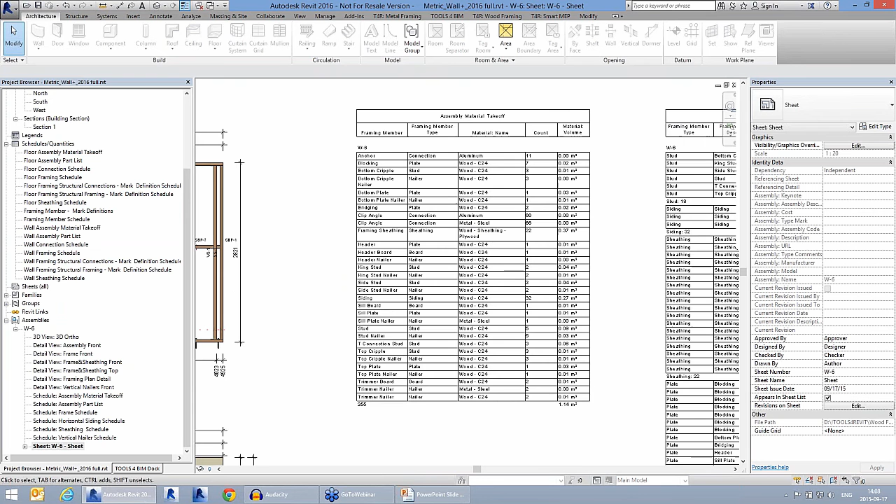Now I would like just to show how it's done from the beginning, but in general this is our target, what we should get. And today I will try to explain how to frame such a house. At the same time, if we talk about Wall Plus, here we will be able to create automatically shop drawings for every individual wall panel. So we will make shop drawings automatically, the tool will add dimensions, the tool will make schedules automatically of material takeoff and the part list, and we will put all those views into the sheet.

So now I would like to start with an empty project. First I would like to say that Wall Plus you can find in the separate tools for Revit with the framing tab. In the beginning I would like to show that this is a regular wall that comes from architects. It has the layers with the thicknesses and with materials, and we're saying that here we are going to put the main frame, then sheetings from both sides, then the layer for the nailers, and then the siding. So this layer we are going to use for making sidings.

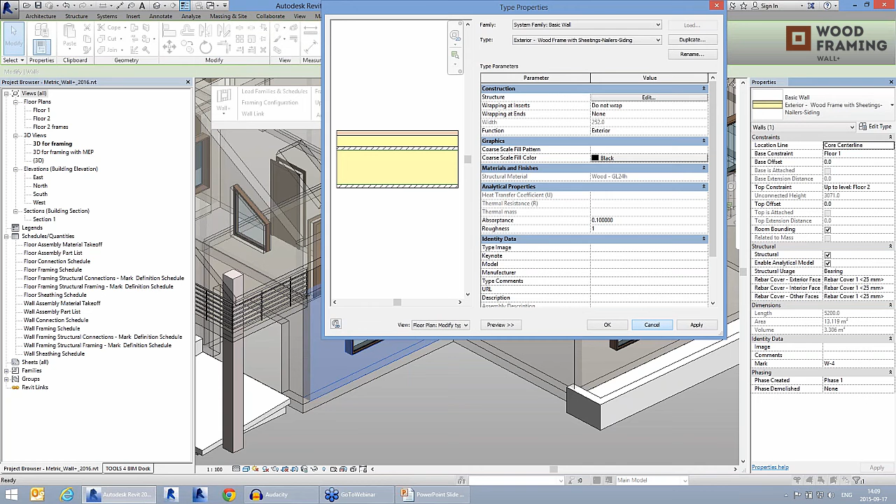So if you would like to frame the walls, you have to make a link between the wall type and the framing, and as you can see here we can predefine and set each individual framing layer for every wall layer, and at the same time we can predefine the configuration, what kind of settings we would like to apply. In our case, let's frame the wall, so let's add main frames into those three selected walls. So in general, you just need to select walls from the project, press on Frame Wall, and the tool will frame those walls according to the predefined configuration.

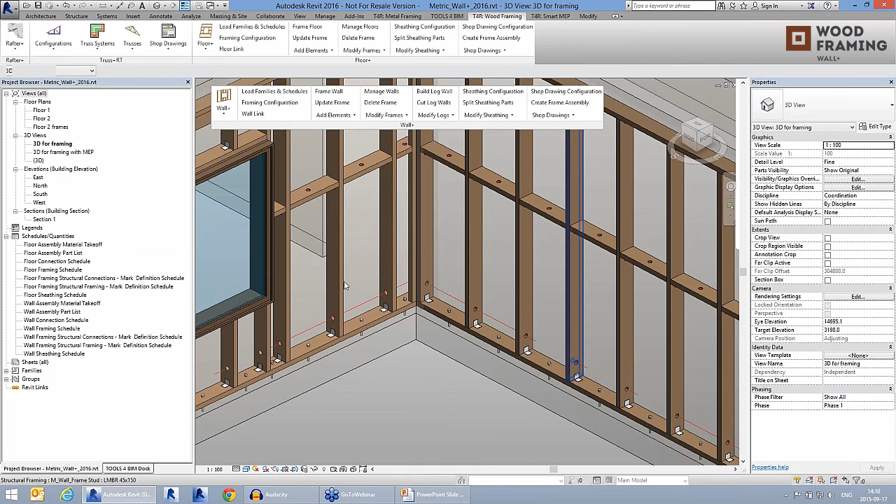Okay, so we're finishing with framing those wall panels. And now the tool has created the frames automatically with predefined distance, with connections, with some headers, with some top supports. And let's take a look where it comes from, where we can predefine such settings.

So in the Wall Plus we have framing configuration, where you can predefine settings for all the frames. Actually all the settings are grouped together according to configuration type. You can predefine your own configuration separately for the battens. It means horizontal nailers, then for the main frames, then for the horizontal sidings. If it's necessary, you can predefine settings for the secondary frame or for the vertical nailers or for the vertical sidings, and even you can predefine settings for the log houses.

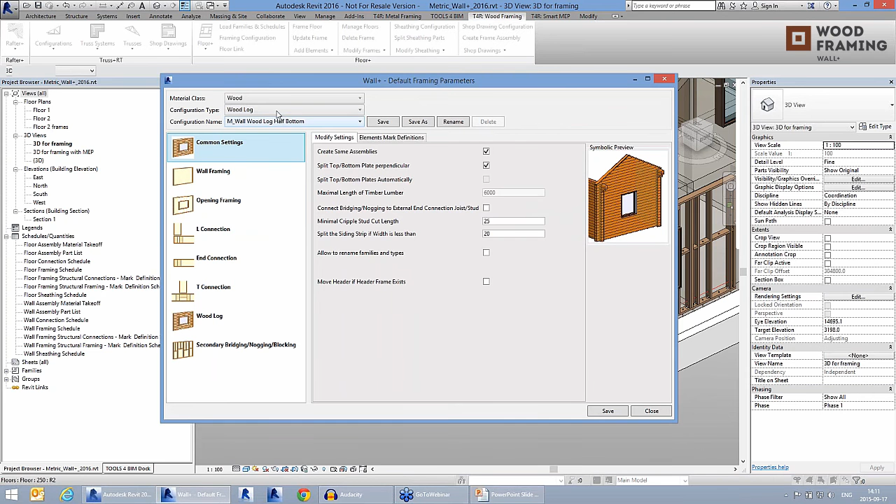Okay, so let's take a look into the main frame, because here we have the biggest amount of different settings, and you can save your configuration under your own name. Actually, some default configurations will be automatically loaded into your project. And here you just need to predefine what families you're going to use for the main studs and for the plates. Then what will be the mark definitions. That's very important, because those descriptions and framing member values will be added later into your schedules and could be used in your tags.

Then with the wall framing, you have to predefine the distances between the frames, what will be the top plate, what will be the bottom plate. Maybe we're going to have the cut, for example, or if it's necessary, we can have some additional offset from the base or from the bottom of the wall.

Then we have options to predefine openings, opening framings. We can predefine different opening headers for different window sizes, for example, because here we have configurations separately for windows, doors, and for other openings. And you can choose that if your window, let's say, is from 1 meter to 1.5 meters, you can predefine configuration with such a header or with any other header from the list.

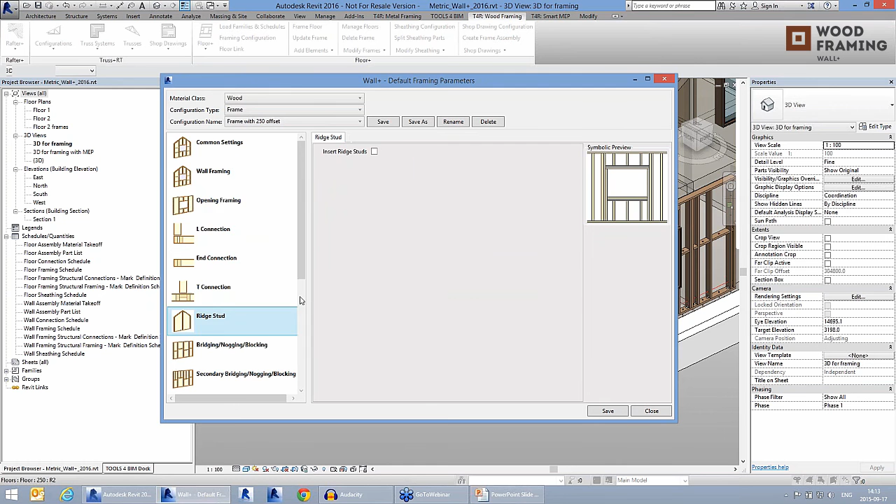Then we have settings for predefining different bridgings, blockings, and noggings. Again, here we have really flexible rules for predefining additional bridgings and blockings. Then we can predefine a secondary bridging, blocking, and nogging. Then the bracings. Then we can additionally add studs and additional bridgings and blockings to our specific place if it's necessary.

Then we can predefine details automatically, like we saw in the frame in the beginning. There could be different angles added between the plates. Then we can automatically add the service holes between the families. And we can put details and service holes only on the studs separately. So all those settings you can predefine and save under your own name, and actually those settings could be shared with other users. And it's very similar to any other configuration.

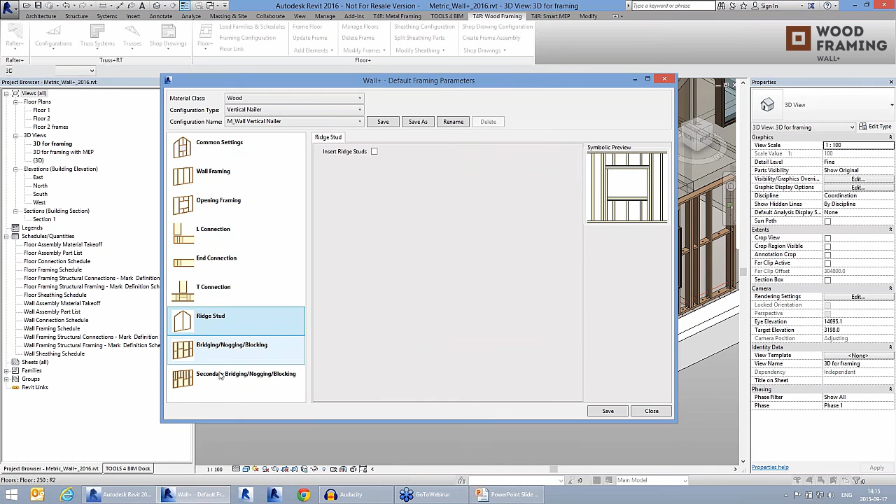So if we talk about the vertical nailers, again we have settings, but they're very common and very similar to the main frame. Just here we have settings only for the vertical nailers. And if we have such name, then we can make a link like we did before. We have the possibility to make a link between the wall type, which comes from the project, and the configuration from the framing configuration tab.

Okay, so let's frame more walls. I'm going to select more walls with more complex shapes. So there will be 3 more walls framed, and here I just want to show one example with a triangle window. If we have such scenario and such window in the project, we can frame it very easily.

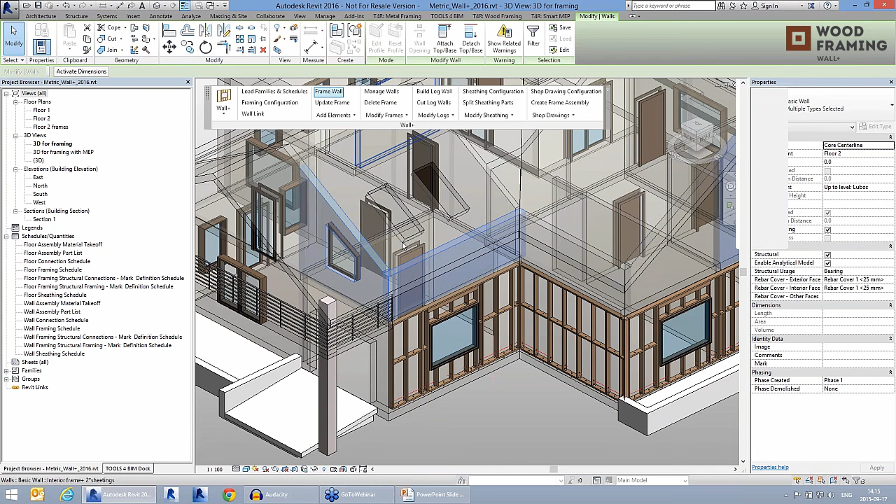And if our wall shape is complicated, and actually if we have a cut according to the roof, again we can very easily frame it, and the frames will be automatically adjusted according to the wall shape.

Now, if we would like to make any other changes in the project, let's say if we make any updates, for example, I will move a window a little bit, or we will make some changes with the wall, we can very easily just select any frame from the wall, and we just need to press on update frame.

And now the tool remembers all those families, all those frames which were added into the wall, and now the tool updated those frames. Well, some connections were duplicated, but it's not so big deal at the moment. Okay, after updating, we can very easily see an updated wall.

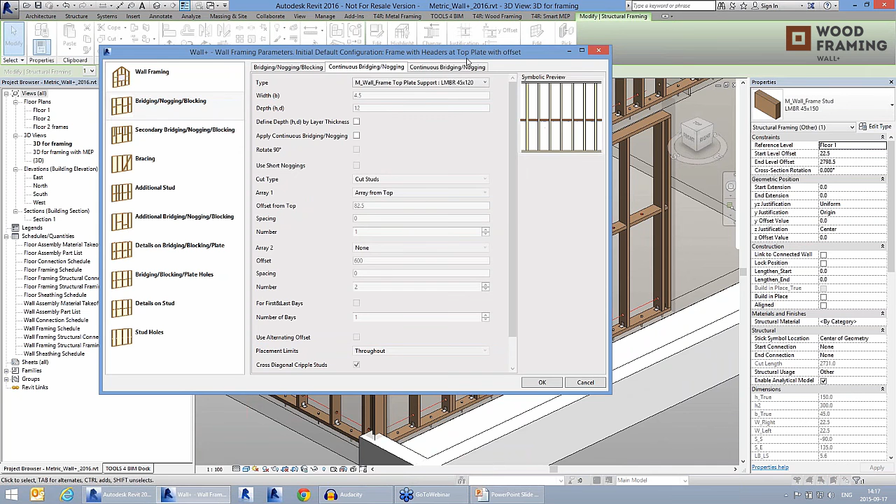And let's say if we'd like to make some custom settings and to change some custom things in the framed wall, we can go to the modify wall framing, and here if it's necessary we can change the distances between the frames, or we can say that we use alternating offsets between the noggings, and maybe such continuous nogging above the window we should delete at the moment, because here I'm going to use Warren cripples, so I'm going to move out those supports which are above the window.

In general, what I would like to say is that with the Wall Plus, you can very easily work with bridgings and noggings, because there are possibilities to place them through the whole frame, or through except openings, or only through the openings, like it was in our case. So you can have such scenario, or you can add support through all the wall in the project. Okay. And that's it, we have results.

So here we have created alternating offsets between the noggings, and if we would like to modify custom header, we can very easily go and change the header here, but in such case I'm going to add Warren diagonal cripples above this window.

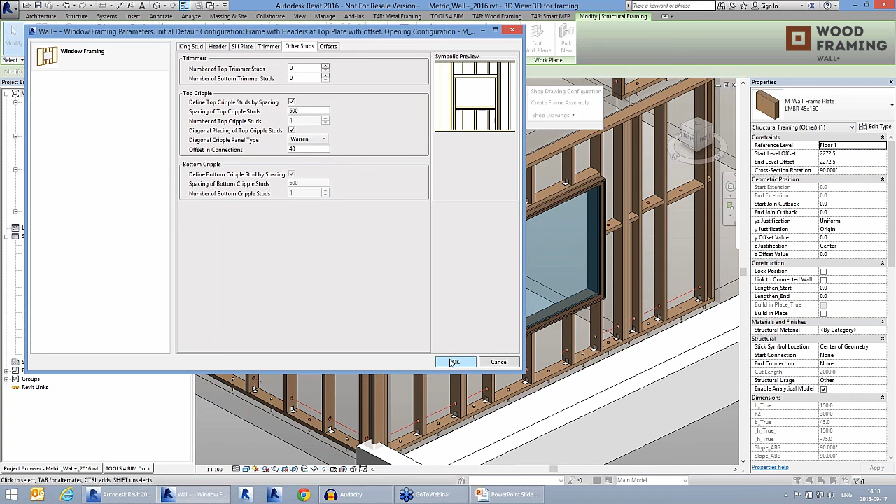And one more thing about connections, we can predefine, as you can see, those L connections and anchors. They are distributed automatically, but again it depends on your project. So as you can see here, we have Warren cripples above the window.

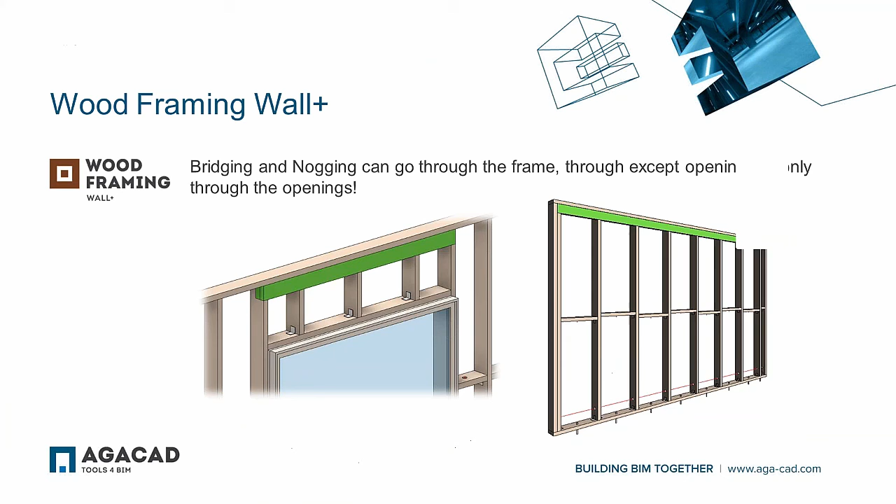And if we talk about connections, you can just make your own specific connections, because here with the Wall Plus we have possibility to distribute connections in different ways, and you can choose your own family for adding those connections, and you can predefine the rules how those connections should be distributed, or maybe not. Maybe in some cases you don't need to have them.

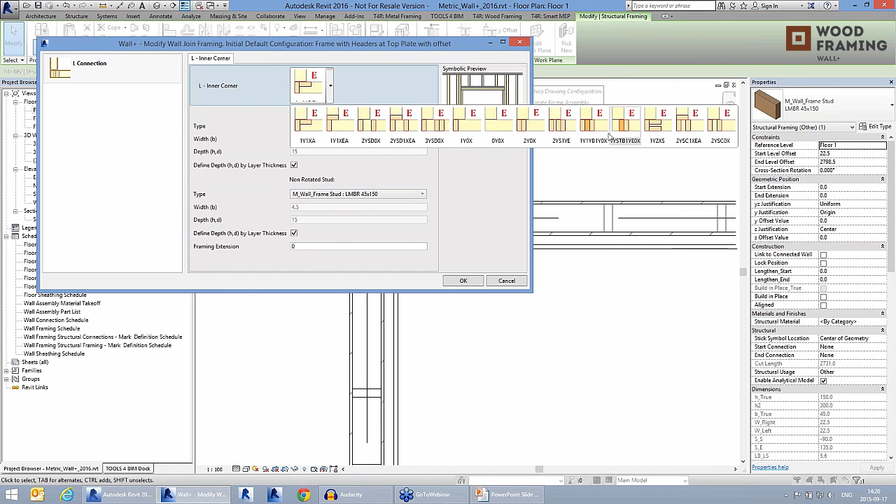Okay, now let's take a look into the plan view, and as you can see, the frames are created exactly in the layer where it should be. And once again, if we would like to modify the joints, for example, you can very easily predefine the setting which will be used for the custom joint.

And again, I will go to the slide, and I just want to say that there could be complex connections and multi-layer framings in the walls, and if we talk about the headers and sills for windows and openings, then here again we can predefine our custom families for such headers and for such sills.

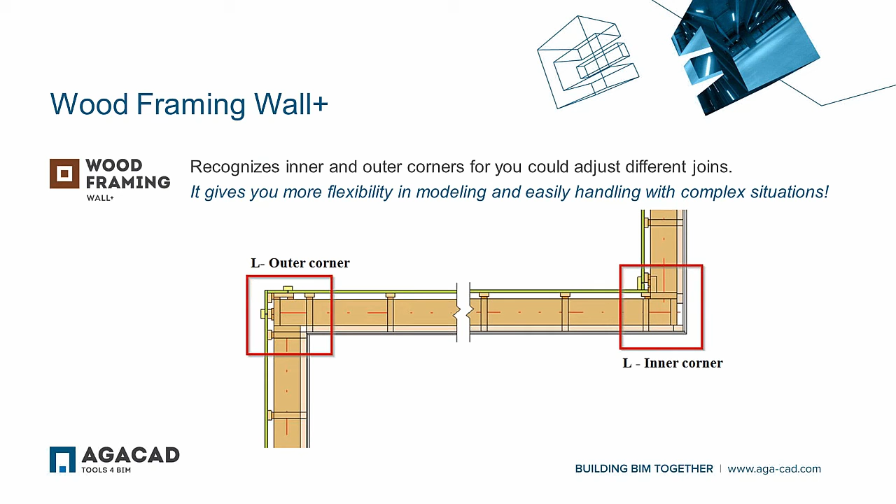And there are a lot of L and T corner types in the project. They are hard-coded, but if you see that some of them should be added additionally, we can very easily include them. And the tool will recognize inner and outer corners, and actually it gives you flexibility in modeling and easily handling the really complex situations.

And again, if we have walls which are connected between themselves and it's just a straight connector, we can very easily apply offsets and our own rules. Okay, so we can see the result. We have such a corner modified, and now let's add more layers.

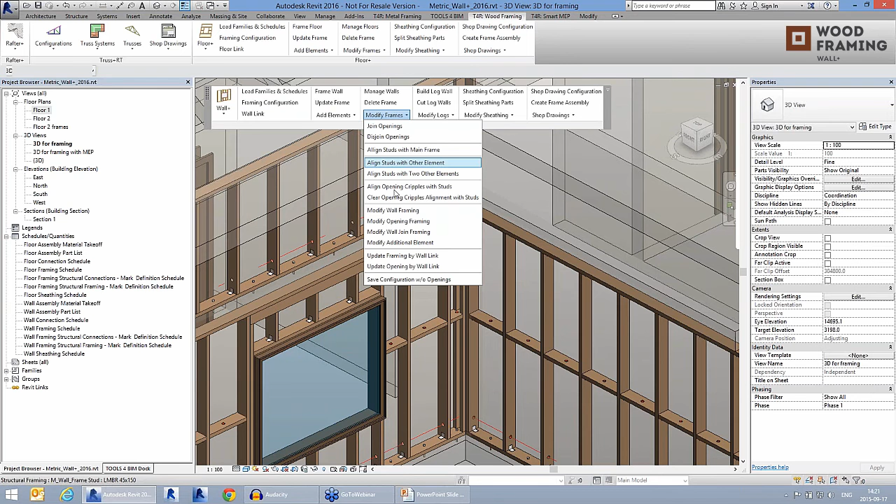Well, if it's necessary, for example, to align the frames from two separate walls, we can very easily go to align studs with other element. We just need to select two studs from the wall, and the tool will align them automatically. So the tool will align those two walls between themselves.

Now let's add more elements. In this case, I'm going to add nailers. So again, while it's working, I just want to show that there is possibility to add vertical and horizontal nailers. It depends actually on the sidings which you are going to use. So it could be vertical and horizontal sidings, and depending on the siding, you can apply vertical or horizontal nailers.

Okay, we have them here, and again we can very easily align those studs with the main frame. And as you can see, this frame is added into the layer where it should be. So it's added into the layer which is created especially for the nailers.

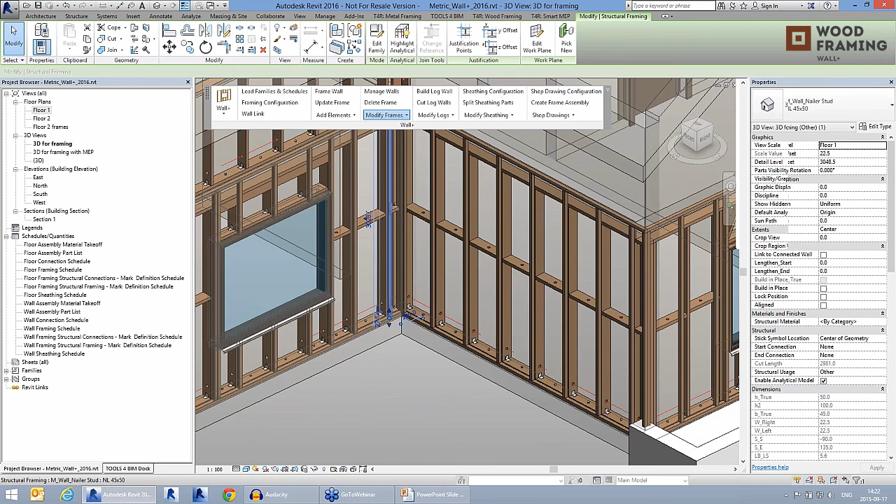Okay, and just now we can say that maybe some additional elements should be added into the project, so we can add additional studs, for example, with some predefined offset. Okay, or we can add additional bracings between the studs. Again, we just need to predefine the offset from the bottom or from the top.

Then we can add additional bracings between horizontal elements, like that. At the moment, my bracing is wooden bracing, but also if it's necessary, you can add metal bracings. And just one more example, let's frame some internal wall.

Okay, and we're going to add here metal bracing. So in such case, I'm going to modify wall framing. Let's go to the bracings, and here I'm going to say that I would like to use some metal bracing. It could be T or L brace, and I don't want to cut studs or bridgings and noggings.

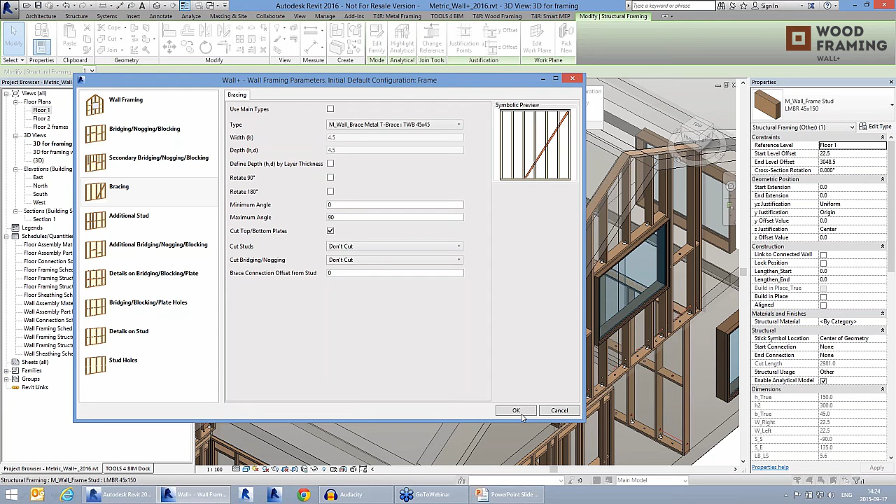So let's modify this wall frame, and we will be able to insert metal bracings between horizontal plates. Okay, and now we have to go to add bracings on the external or internal sides. And that's it. The tool will add the bracing on the external or internal side according to our predefined rule.

So in general, if you work with the wood, still you can insert additional elements which are metal. One more feature, let's say if we have two windows which are close together, and if we would like to have one sill or one header above, we can very easily join those openings together.

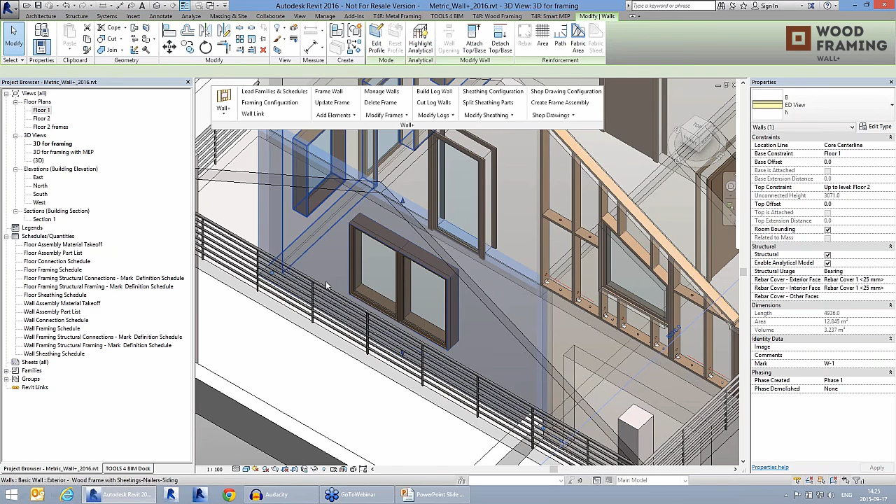Okay, and if we will try to frame this wall, the tool will join those headers. So here we are going to have one header and one sill for those two separate window families. Okay, and that's it. We have separate windows, but still we have one header and one sill.

One more feature is let's add sidings. So now I'm going to select two walls and I'm going to add sidings automatically. And I will come back again to my slide. Here I just want to say that we can include vertical and horizontal sidings, but at the same time we can have mixed combination between vertical and horizontal siding.

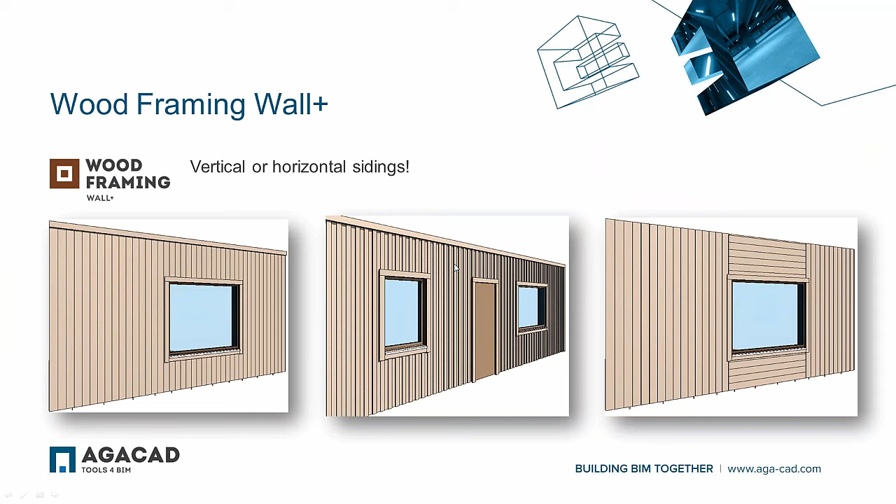So with Wall Plus we can say that horizontal sidings should be used above and below the window, and all other sidings should be vertical. Okay, or we can have such double siding. So in such case you would need to have two layers in the wall, which will show two siding layers with some offset between them. Okay, and that's it. We have a result. We have those sidings added automatically into the project.

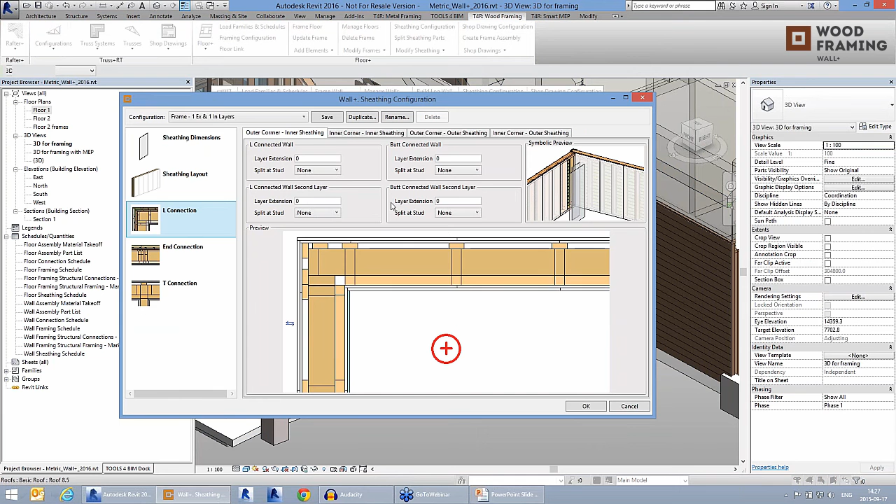Now let's add sheathing. Actually with the Wall Plus you can split the sheeting because, as you remember, if we take a look again into our wall link, we're going to add two sheetings from both sides of the frame, and for the sheetings we have a separate configuration which allows to predefine the distances between the sheeting panels, predefine the distances between the layouts, add some offsets from the bottom or from the top, add some connections, predefine connections, add some layer extensions from the end of the sheeting in different corners.

So it's very flexible layout of settings, and then again, as always, you can save those configurations under your own name, because usually we use parts for showing the sheeting. And if we take a look into such wall, right now there is an internal sheeting, but it's one sheeting created without parts, without divisions.

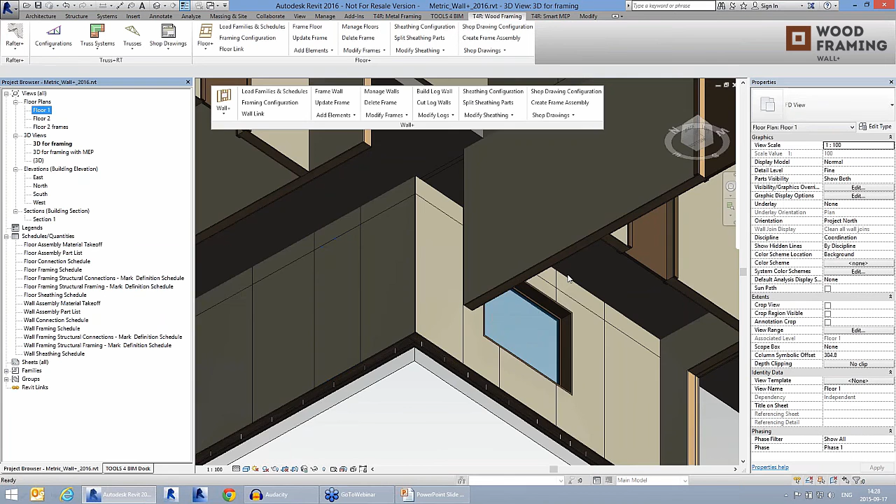Now we can just go to split sheathing parts, select a wall, and the tool will split the sheeting into separate individual segments. The same I'm going to do with another wall, just very quickly. Yes, and now those two walls are split into separate segments. And again, let's take a look in the plan view. As you can see, here we have parts with predefined divisions.

After that, we can very quickly predefine shop drawings. First, I have to predefine configuration for making shop drawings. So here I have to choose what kind of views I would like to see. So we are going to make assembly.

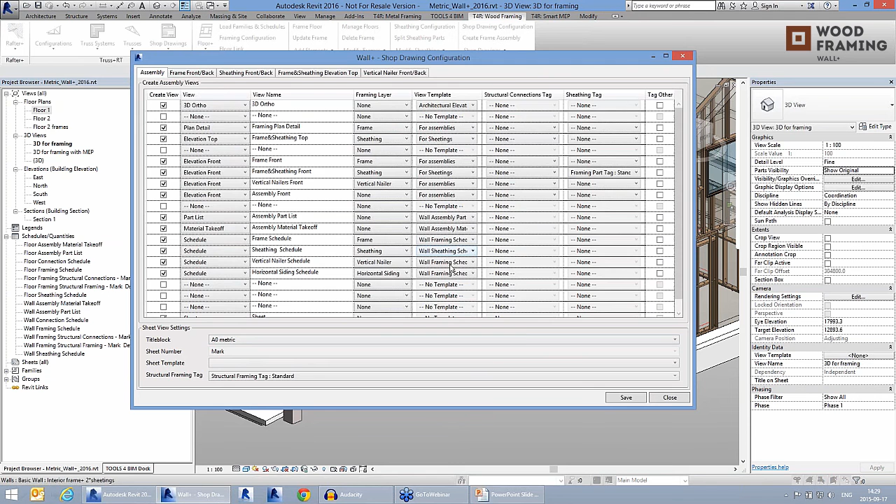And I do have to predefine what will be the views, what kind of layers I would like to see in every view, what will be the view templates, what will be the title block, what will be my schedules created automatically for each panel. You can choose existing schedule from the project and use it as a template for making shop drawings. Then you have to predefine the dimension styles which you're going to apply.

And now, after setting those configuration settings, we can make shop drawings. You just need to press on Create Frame Assembly, select a wall, and now the tool will make assembly automatically. So it will collect all frames from the wall. At the same time, the tool will add dimensions on every frame. Then the tool will add tags. Okay, and later we are going to put those views into the sheet automatically.

That's it. We are ready to see the result. So this is our 3D view. Then we have a front side view. Okay, and then front side view with dimensions only for the frame. And one more thing we have to do, we have to renumber those frames, because the tool will renumber every frame according to its length and the type.

Okay, so for example, vertical stud number 1, and this is also number 1 because they are mostly the same. They are created under the same type and the same length. And also let's renumber structural connections, because it's very important if we would like to have a separate schedule for the connections.

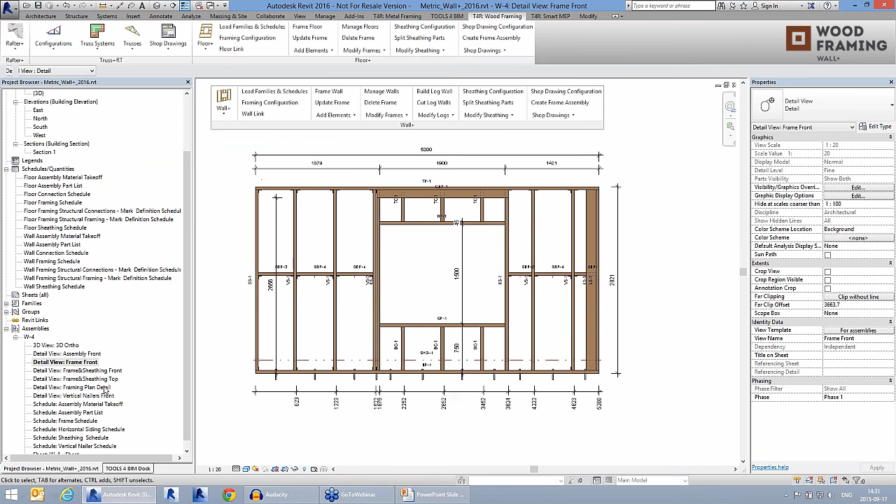Then we have a separate view only for the sheathing, then a top side view with nailers, then material takeoff, and now we can put those views into the sheet. So here I'm going to place a regular front side view with the main frame, then the view with the sheathing, then the top side view, then maybe a 3D view I'm going to put here. Then let's add material takeoff.

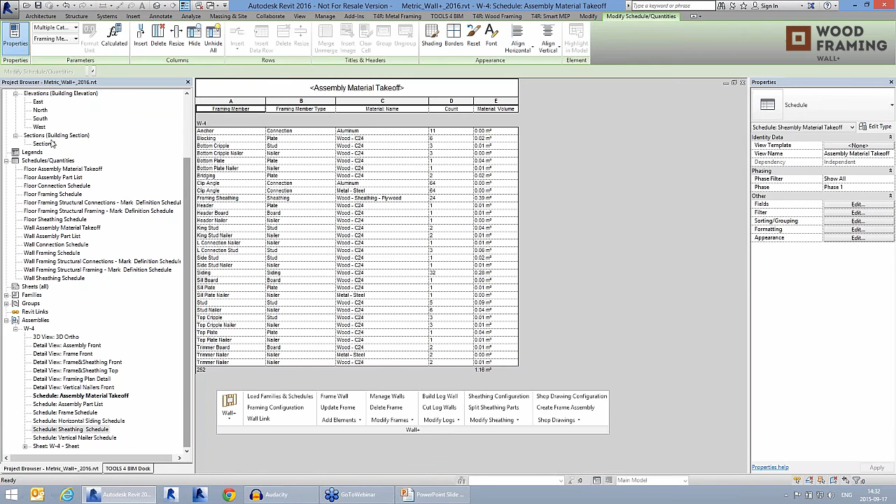Okay, then let's add a part list, and also maybe separately we will add a schedule only for the sheathing. So in such case we'll know what is the sheathing mark, what are the sizes of the sheathing, and what is the weight, because the tool will also calculate the total weight for the total frame. And now I'm going to say that this sheet will be used as a template for making all other sheets.

And let's create assembly for another wall. So now the tool collects again all frames from the wall panel. At the same time it adds dimensions, it adds tags, and the tool adds the views into the sheet automatically. So we can just open the sheet and see the total results. So again, every view which is needed, then material takeoff, then the part list for every element, then the mass, the weight, and a separate schedule for the sheathing if it's necessary.

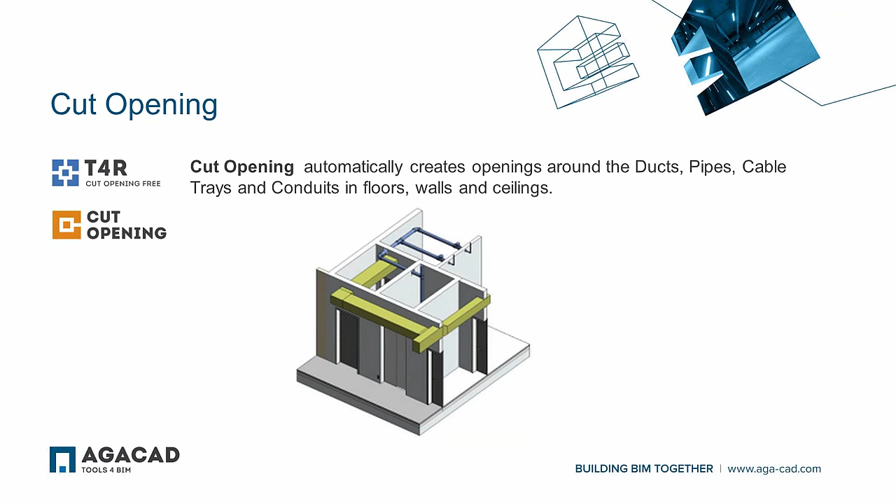Okay, now I would like to say that sometimes if you have MEP elements in your project, you need to make openings around them, because such openings also should be framed automatically. I'm going to show you one example with this wall, because this wall is used together with ducts and pipes. So first let's frame this wall, and you will see that the frames are created, but we still need the openings. If we take a look here, the openings are not created because there are no openings in this project.

In such case, we recommend to use our Cut Opening. There are actually two Cut Openings. One is free of charge. For example, if you don't have links in your project and it's not a very big project, then you can use the free version. But if you use links in your project, or if you have a really complex and big project, or if you would like more options with adding openings, then you should use the professional version of Cut Opening.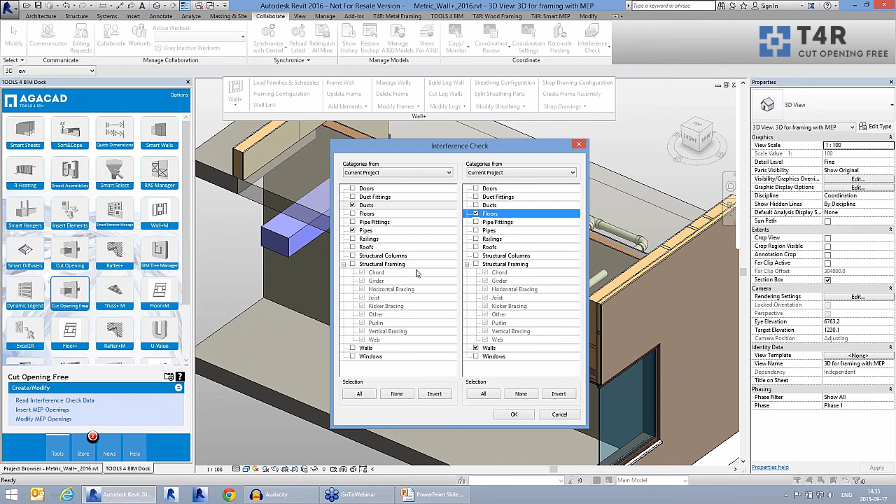So first I'm going to find collisions between pipes and ducts from this project together with walls and floors. Revit finds those interferences. I have to export them anywhere on my computer. And now I have to read those interferences, so I pick the HTML file. Then the tool will show you all those collisions. If it's necessary, I can add some cut offsets around those ducts and pipes, and it's very handy because you will see where exactly those ducts and pipes are. Now I'm going to save this information in a separate XML file.

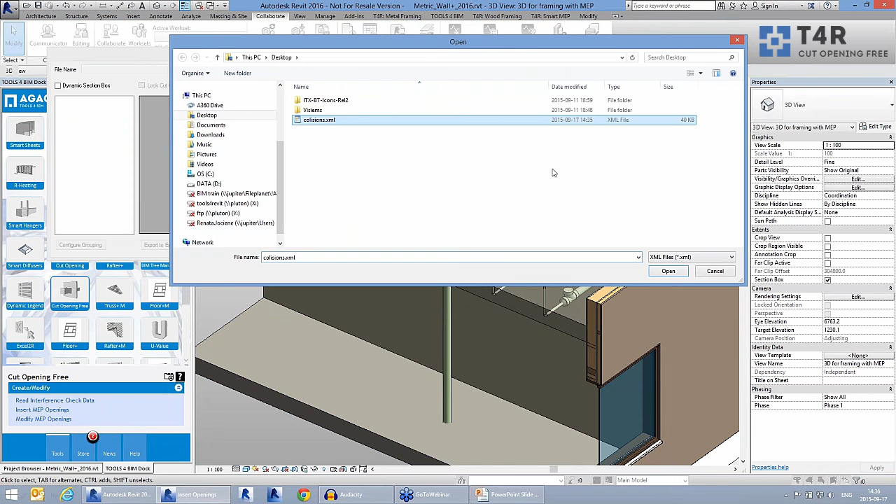Okay, and we're going to insert those MEP openings. So I'm going to select this XML file. If it's necessary, you can make some changes with cut offsets, or you can change the shape of the openings. And after pressing insert openings, the tool will insert the openings automatically into the project. Okay, there are 9 openings automatically inserted. As you can see here, we have those openings.

And now we just have to press on update frame and update our current frame, which was created before. So now the tool will take a look into the openings, and the tool will frame those openings. So around every duct and pipe, you will be able very quickly to have really nice looking frames.

Okay, so now we're updating the wall frame together with those openings, and that's it. If I'm going to hide this wall, we can see that the openings are created, and everything is okay.

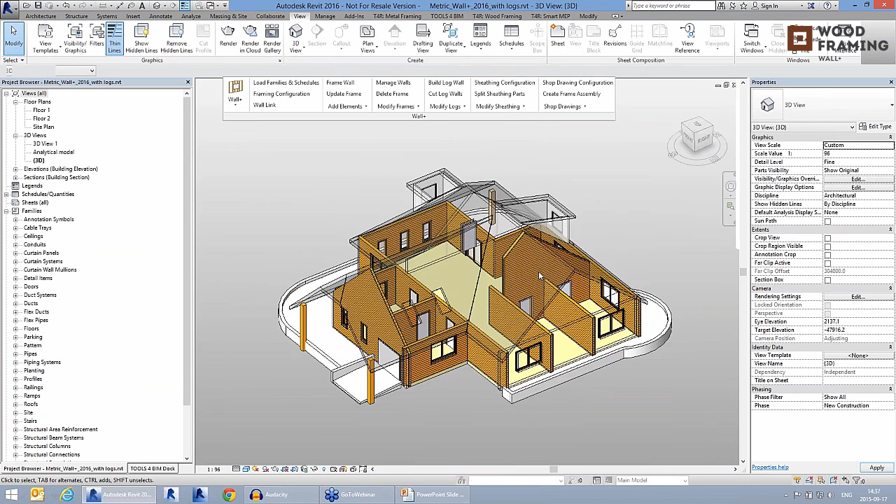Now, what more can you do with Wall Plus? I would like to show you one more feature, the possibility to work with log houses. Again, you can just predefine the wall layers, and we're going to say that here I'm going to use logs instead of main frames. So you just need to select the wall and select build log wall. So now the tool will add logs automatically into this wall segment.

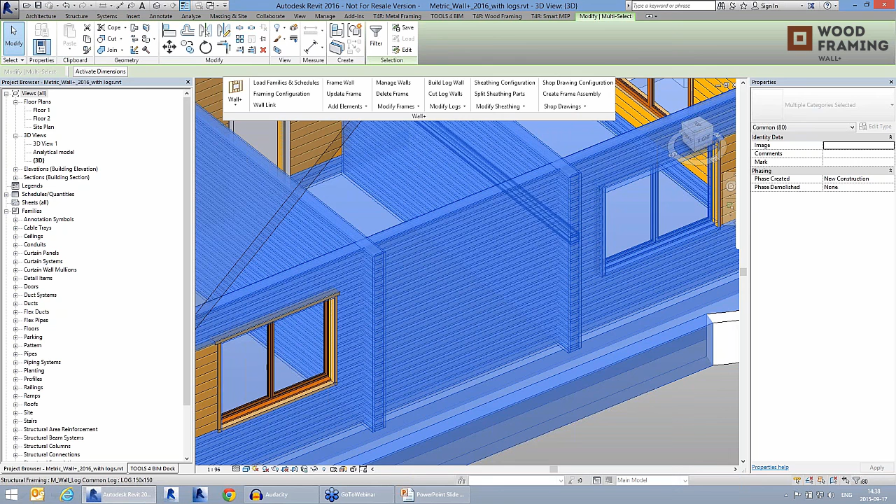Then, if we would like to cut the logs between themselves, again, it's very easy. You just need to select the logs, or you can select all of them and just press cut log walls. And that's it. Now we have those cuts, and if I try to isolate this element, we will see that here we have really nice looking cuts.

Actually, you can modify and use your own profiles. You can even add some decorations, for example, in the beginning or in the end of the log. So you can just predefine additional offsets and some decorations in the ends if it's necessary.

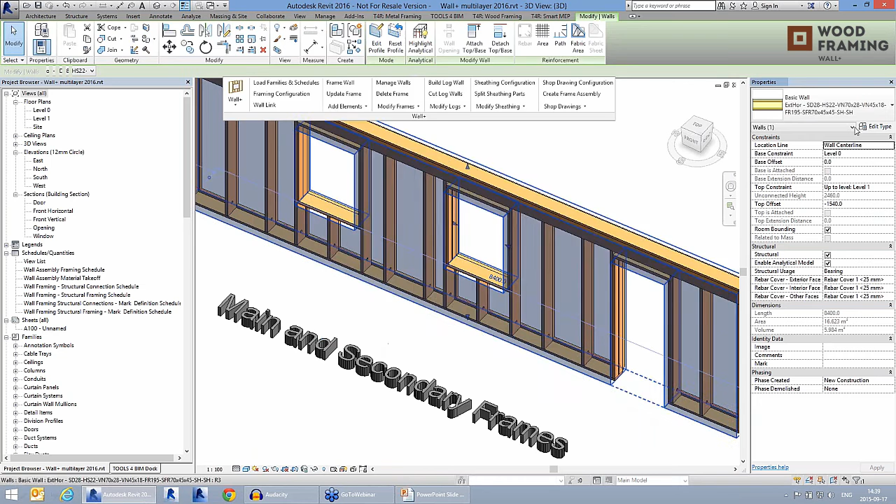Okay, and then one more project which I'm going to show. I would like to show how a complex wall could be framed. In this case, this is my really complex wall with a lot of different layers. There are main layers, then there are 2 sheetings from one side, then there is a secondary layer, then there are 2 vertical layers, then an external decoration layer, and a horizontal siding layer. Even such a wall could be framed, and in such a project we have split the walls into separate views.

So here, as you can see, we have the main and secondary layers in the wall. Then separately, as you can see here, this is a secondary inner layer, then horizontal siding with finishes. So if you would like to use your own profiling for the finishes and for the waterproofs, you can modify them, and you can use your own families.

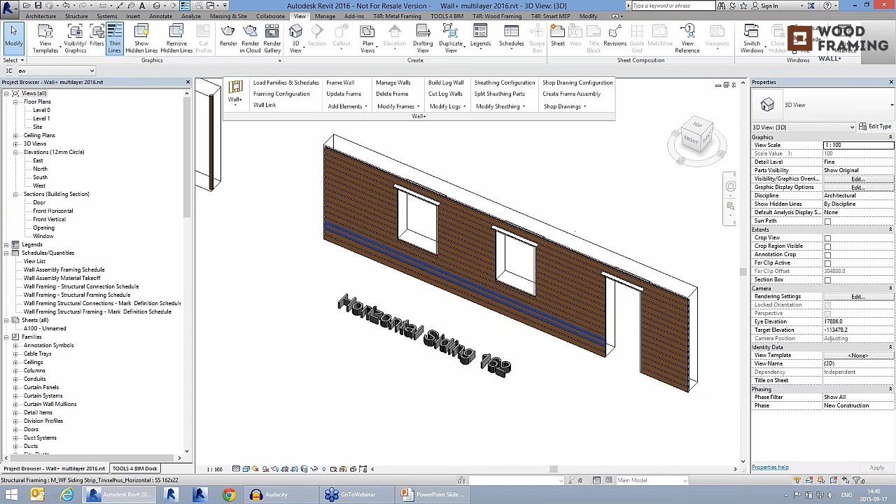Then, as you can see, this layer is used for the siding finishes. Then this layer is used only for the siding. Then this goes for the vertical nailers, and then one more for outer vertical nailers, and one more for inner and external vertical nailers if it goes for the horizontal siding. In such a case, we can have a really complex wall with really complex L connections. So it can look like this.

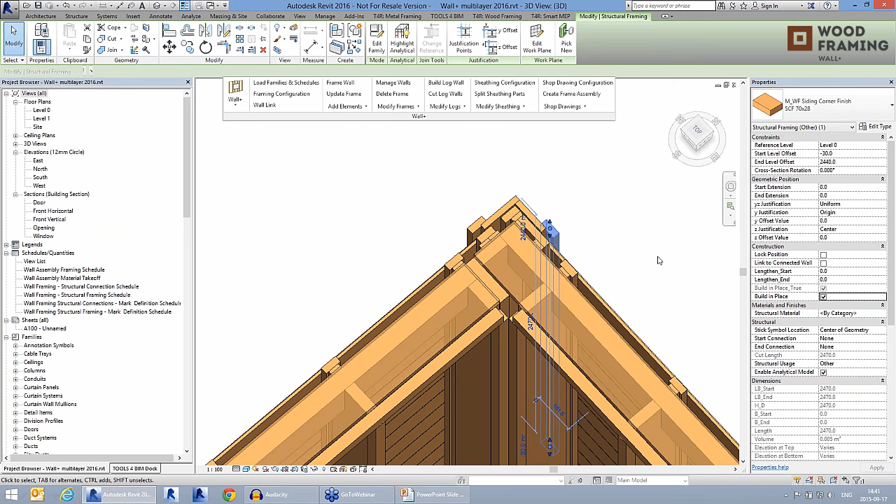And even some parameters you can modify through the properties. If I select, for example, such a family, such studs, we can say that this family should be built in place, and in such a case this family will not be included into the assembly, into making shop drawings, but still it will be included into the schedules.

Okay, and now I would like to come back again to my previous project. The second tool is Floor Plus. It actually works in the same way as Wall Plus, just it goes for working with and framing floor panels. The scenario and the principle is the same. You just need to have the floors with your predefined layers which come from the architect, and as you can see, it's very similar to Wall Plus.

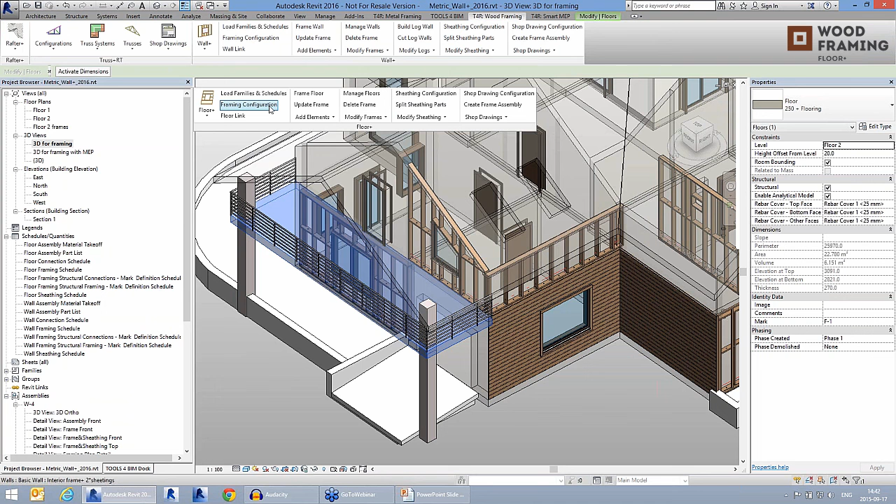You have to predefine configurations for the buttons, for the main frames, for the flooring. Then you have to make a link between the configuration and the framing layer, and then you just need to frame the floor. So now the tool will analyze the shape of the floor, and it will frame this floor panel.

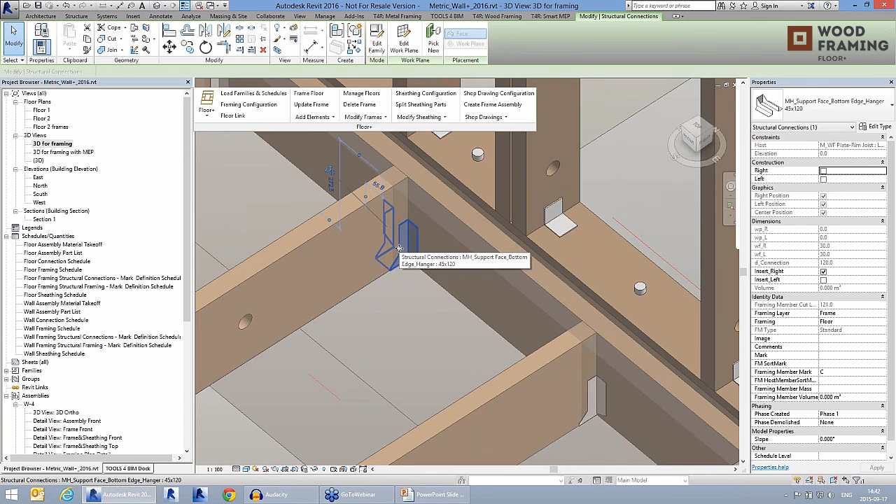And here again we have different connections. In such a case you can use different hangers or supports for the floors. This is our sample Simpson hanger, but you can use any of your own families for such supports. And again, if we have an internal wall, we can very easily frame the floor.

Also, a good feature in Wall Plus and Floor Plus is that they're combined together. I mean, if you have floors and walls, you can very easily align elements between themselves. You can say that you would like to align the wall frames together with the floor frames. So you choose the floor frame, then the wall frame, and they will be aligned between themselves.

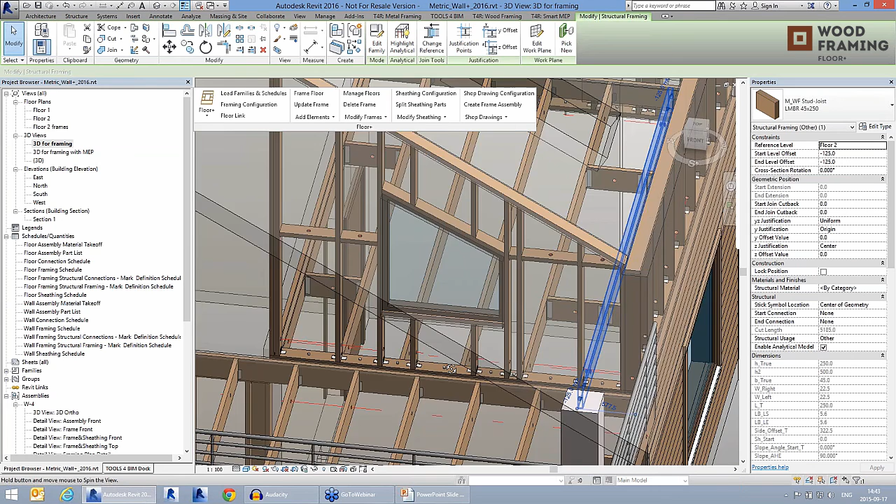Also, a very important thing in those two products is that the frames which are created with those two products are actually structural families with analytical lines. So later, if you would like to make calculations and push that into a calculation system, you can do that anytime. I mean, you can make analysis and push it to any calculation system, for example Autodesk Robot.

Okay, and one more example. I would like to finish the floor. We can add battens, or we can add flooring. In our case, we're going to add flooring. And the same as before, you can prepare shop drawings very easily in the same way as we did for the walls. And at the end, you will get a model which is fully framed.

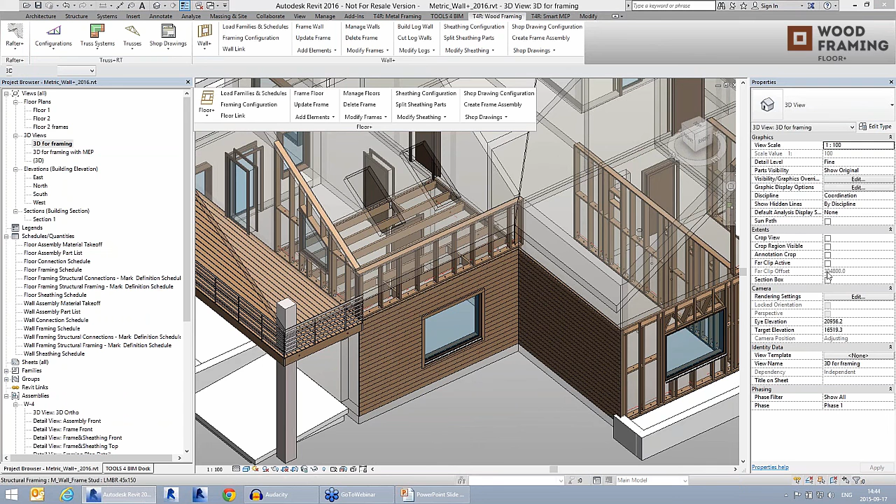Okay, so now I would like to switch the screen to Valence's screen, and he's going to continue with the samples for the roof. Okay, thank you, Renata. I will continue from here. I will talk about our solutions for the roof framing. We have two solutions, Truss+ RT for wood trusses, and Rafter+ for rafter systems. I will start from Truss+ RT and show you some possibilities of it.

Here you can see the sample project already framed with the trusses. This is the result we did with our tool, and we seek to do the framing and finish our projects with our tools as efficiently as we can. This is the palette of our Truss+ tool, and we have 4 sections here: configurations, truss systems to quickly create groups of trusses, and tools to create individual trusses to solve complex situations, and we have shop drawings, of course.

So I will switch now to my sample project, and we will see some action. When you model your walls and roofs, first of all, you have to make configurations and load truss types to your project. I already loaded these truss types, so I have a lot of types of trusses prepared for modeling. Then I have to run through other configurations like Truss Database Manager. Here I can create new types of trusses with predefined framing sections.

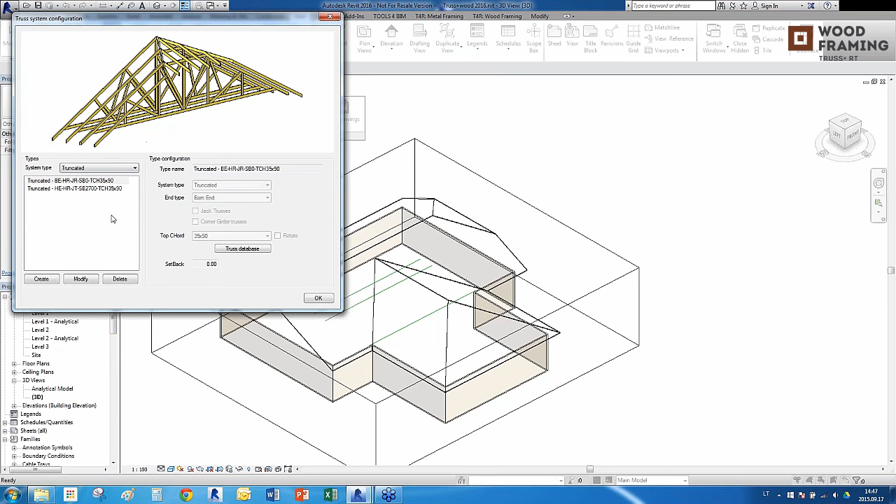Then I have the truss system configurations. These are configurations for the groups of trusses. You can see different types of system grids, so this solves a lot of situations. And then we have truss design settings. Here we can make configurations for jack and corner girder trusses: we configure the webs, how they will be inserted, the connection types, the end types which will be used, and we define the truss type used for special truss types.

After you do all the configurations, you can start creating trusses with truss systems, to quickly insert groups of trusses, and individual trusses. Now I will start from systems and insert a truss system grid into my roof. I will pick the roof, and select the boundaries of my system grid by picking the edges of the roof. After that, I see the configuration window where I can select what kind of truss system I will use for my roof. I will choose this one and click OK.

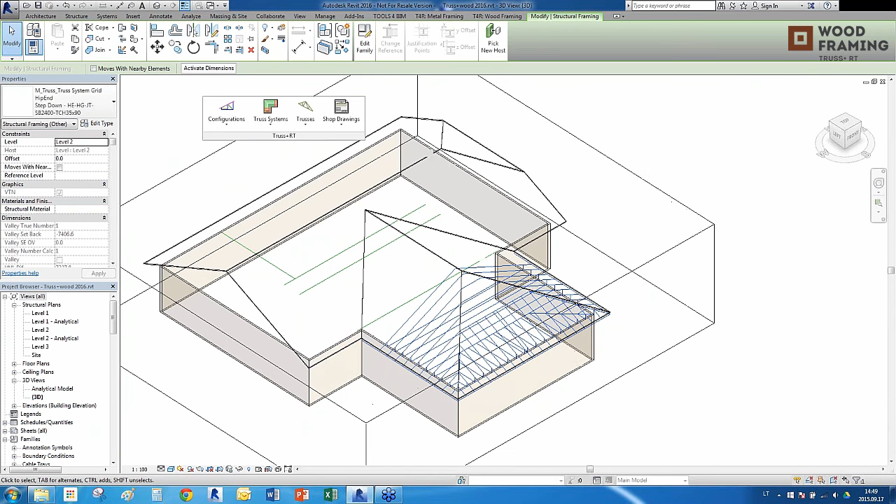And we will see the grid, so we can overview. We can see the lines where the trusses will be inserted. It's only the grid. If we are satisfied with it, we will generate trusses upon them. So you can see that we can use the system grid here. We can use it on the other edge of the roof. I will pick the edges again.

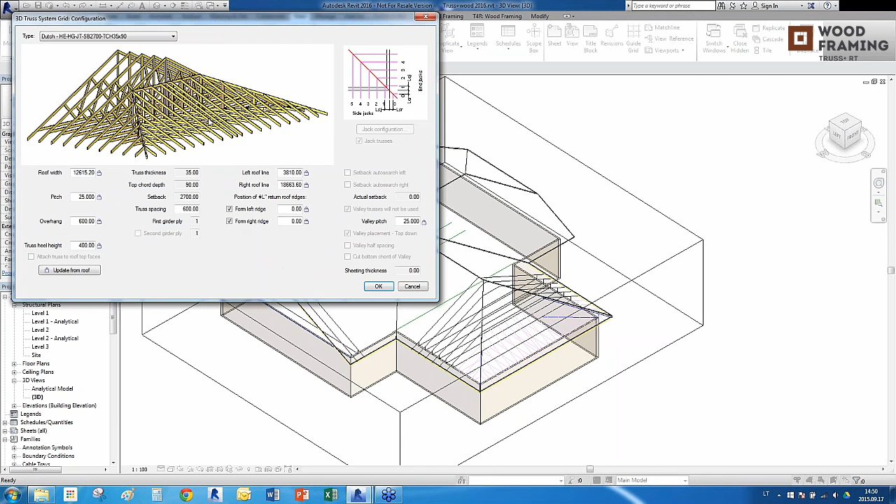Okay, now our tool suggests this type of system grid, so we'll use this one. I will click OK. On this end, I can use the truss system grid again. I will choose the roof, and again the boundaries. Okay, so there are a lot of situations where we can use system grids.

Now I will use this truncated system grid, and we will see that we will have trusses and rafters and so on. So we can insert system grids, and if we are satisfied with the grids, we will generate trusses. I will now go to the generate trusses command, and I have the dialog window where I choose what type of trusses to use. For common trusses I will use Howe type of truss.

For hip barn end trusses I will use again Howe type truss, and so on. So I have to choose what kind of trusses I will use. It will be attic, or it will be Fink, or scissor, or whatever trusses.

So I will click OK now, and we will see that now the tool will create trusses in the place of a grid. It will align our trusses according to the roof. It will cut elements to each other, so we don't need to do it manually, and we don't need to create each and every truss manually, like these trusses are different shapes and so on, so it does it automatically.

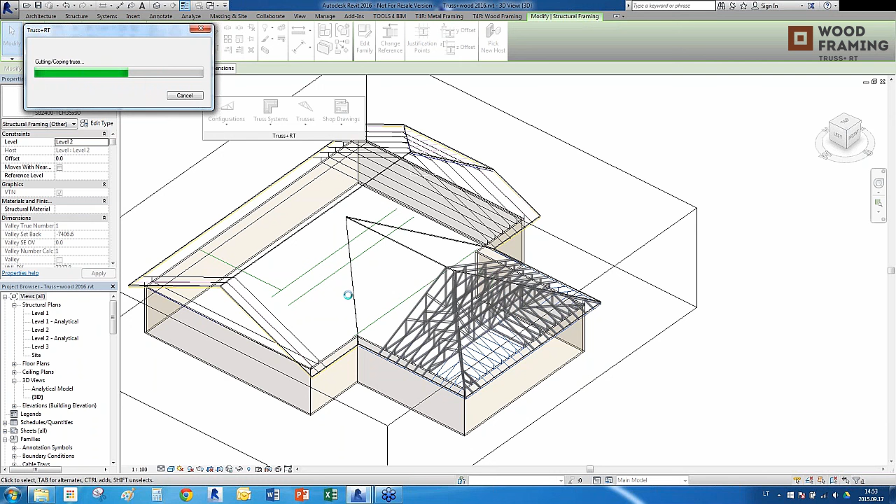So I will better move on to the next section, to the individual trusses, and we will see just possibilities of this tool, so you may better understand the efficiency and the need of this tool. Okay, so we are almost at the end. Okay, it takes a while, but it's like I don't know how many times quicker than to do it manually, and that's okay. So let's see, how does it look?

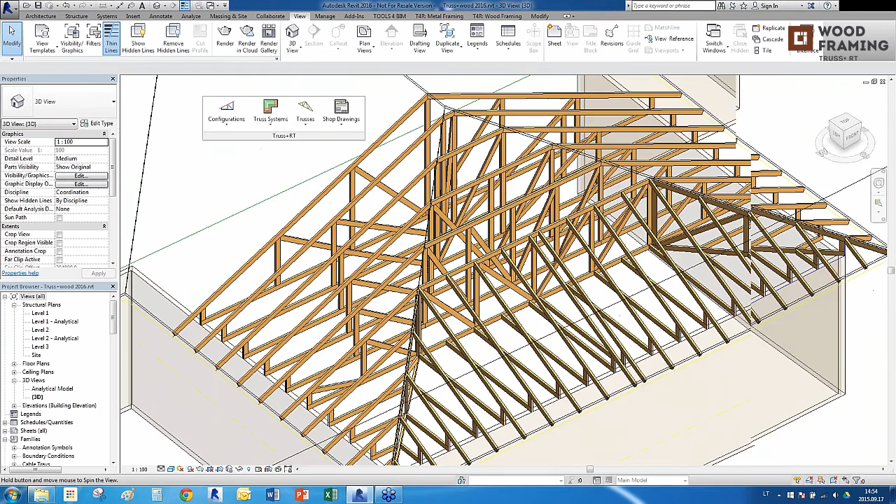So you can see a lot of types of trusses we have prepared here with different configurations, web orientations, and so on. And this is the other way how to create trusses, different types of trusses. So I will switch now to the sample project where I can demonstrate this. So if you want to insert, like here, some kind of a truss, you can draw the model line at the top of the wall.

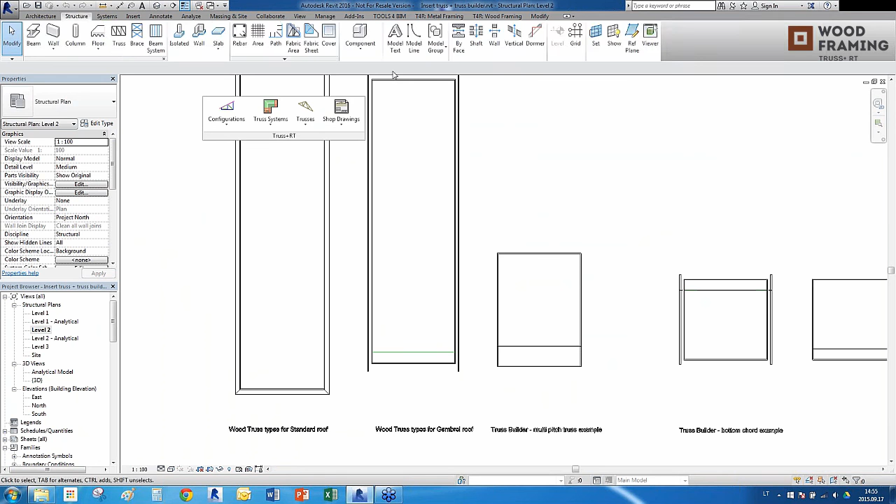Like I will go to level 2, I will choose command, structure, and the model line, and I will draw it from the wall to the wall. And okay, I'll go back to 3D view. I will select this model line, and I will choose command insert truss by selected model line. So now I have the possibility to select the truss I want to insert here.

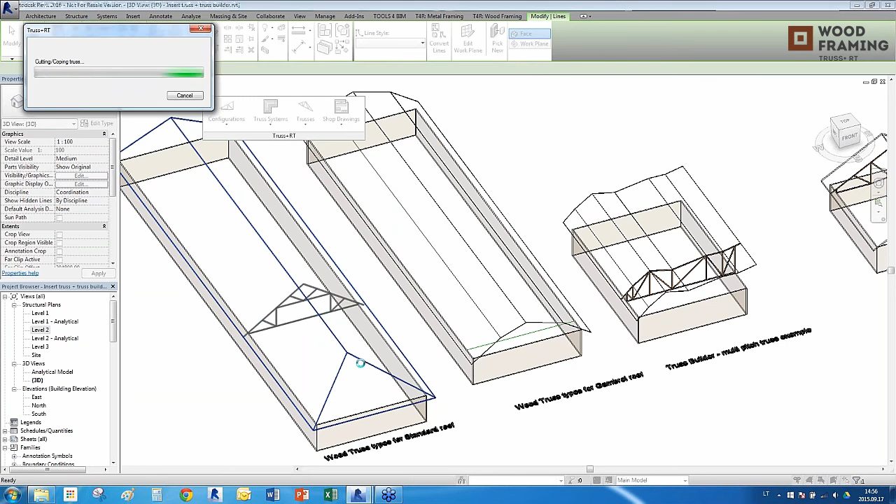So for this situation I will choose some common type of truss, like I can choose attic room or raised vault or whatever type of truss I need, and I will just click OK, and I will pick the roof, and it will adapt according to the roof. And all of these trusses have properties where we can modify some dimensions like the openings, the height of the attic room, and so on.

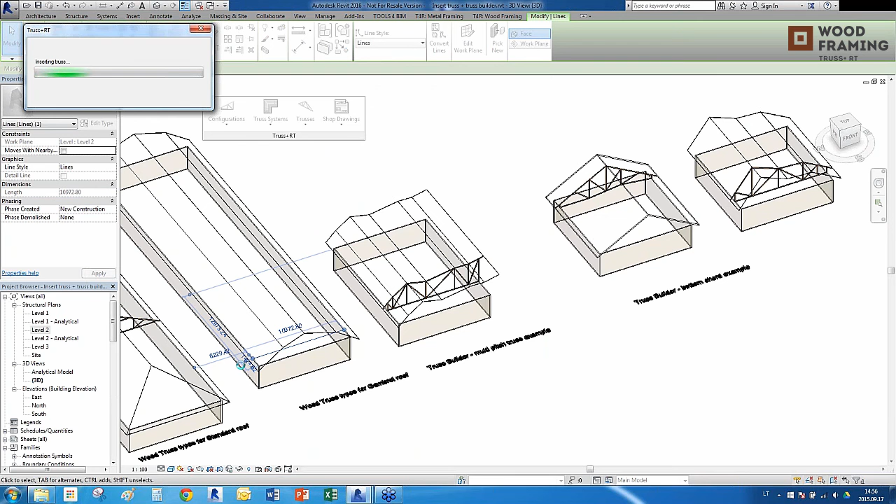So yeah, you can insert like this a lot of types of trusses, like for the double pitch or the 4-pitch roofs, using the same command, like selecting the model line, inserting the truss, selecting the appropriate type of truss, and just click OK, and it will adapt according to the shape of the roof.

So this solves the situations where you need to insert individual trusses and where the system grid does not cover the possibilities. So you can use these options. And for very complex, special situations, like here you can see the different shape of roof, or here with this kind of roof, or here when you have some bottom chord that is not a straight line but a bit different, you can use another tool. I will show you how to use it.

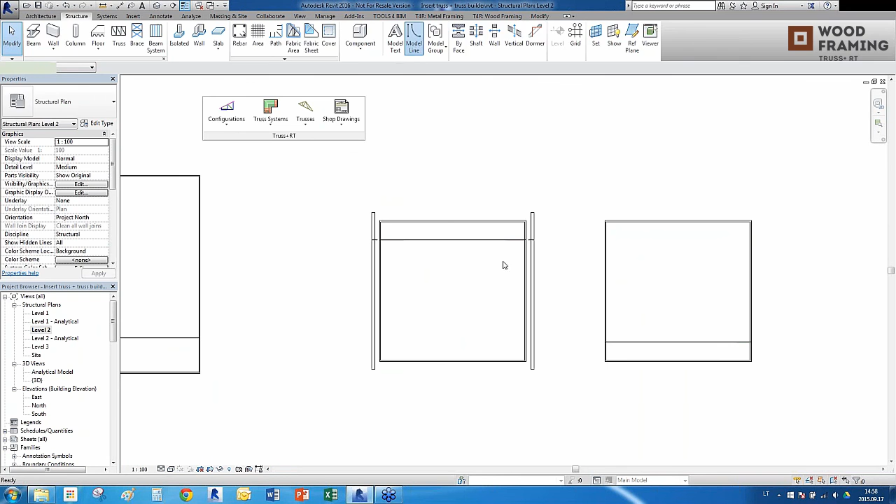First of all, I will draw the model line. I will go again to level 2. I will draw the model line, and this is the help model line, and I will use the command to create section from this model line. And now in section view, I will draw the model line. The model line defines the bottom chord of the truss we are willing to create. So let's say this will be the bottom chord of my truss, and the top chord of my truss will be the shape of the roof.

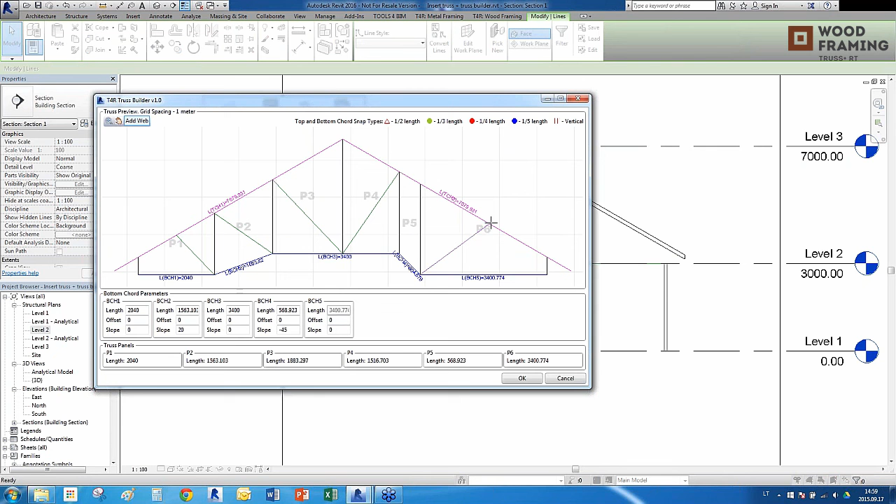So now when I have the model line, I will select it, and I'll select create truss type, not insert truss type, but create truss type. And I will select the roof, and now I have this truss builder here, where you can see the model line. This is the bottom chord and the top chord according to the roof. And I will add webs here to my truss. Let's say it will be like this. Okay, and let's click OK, and let's give it a name.

Okay, and click OK. And you don't need to go to Revit Truss Family Editor and try to create the truss you need. You can just use the shape of model line and the roof and quickly create the truss type you need. So we have some informational notes here, but

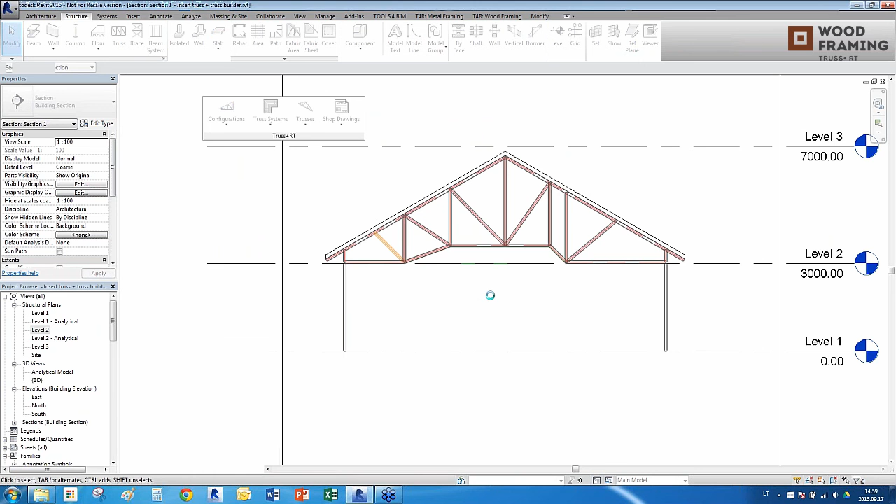okay, and you can see now that we have the truss with all the elements cut according to each other, and we have this new truss type over here with all the parameters and so on. So it's the quick method to create the unique shape of your truss.

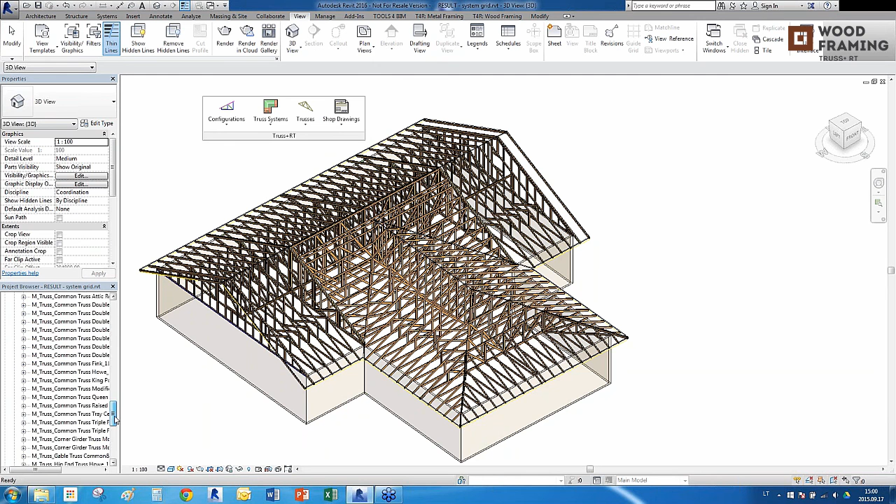Yeah, and the last option is, we can go back to the first project and see that we have these options for shop drawings. So we have again options to sort trusses, to sort elements, and create shop drawings according to the shop drawing configurations. And the principle is the same as Renata showed in the wall presentation, and we can get automatic drawings of trusses with the schedules prepared in just a few clicks.

So I hope you get the idea and the possibilities. Yeah, and if you work with it, you will get more results and possibilities of this software. So for the presentation of the trusses, it's over.

So I would like to show you the other tool for the roofs. So it will be the Rafter tool. So yep, I would like to see this one. So with the help of our Rafter solution, I will hide this one, and I will take now the Rafter tool. So we have the Rafter Plus to frame a roof with the rafters, to insert collar beams, ridges, girders, and so on. And this is the result we seek to create with this tool. It will look like this.

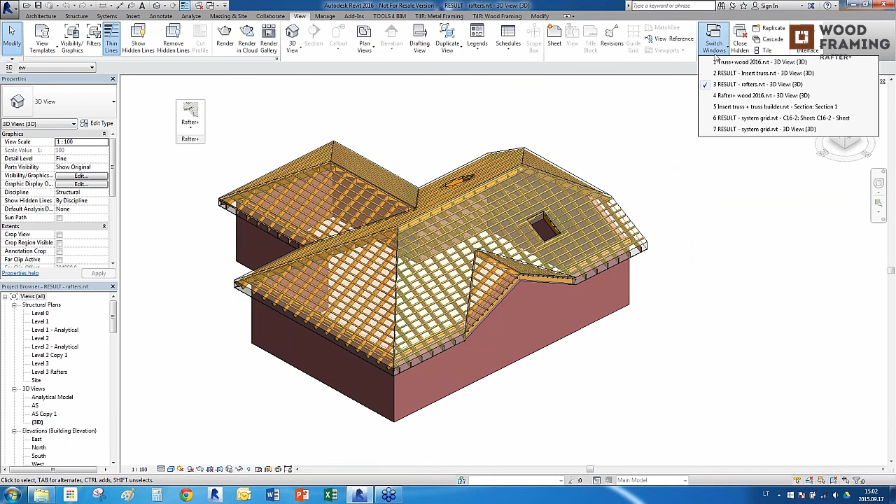So I will try to again show you how to do some of these elements modeling. And yeah, for this I will switch to the sample project, to the empty project. Okay, yeah, I have an empty version. So again, Rafter. First of all, load families. So you will have families for the rafters, hip rafters, collar beams, and so on. And then select the roof and create common rafter systems.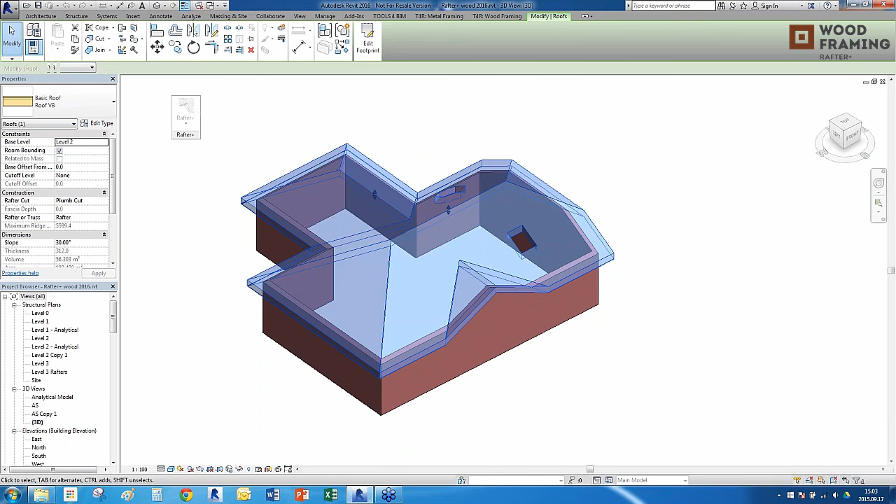Now you have configurations like how you want the end type of rafters to be, what will be the size of your rafters, what will be the spacing. Like if I do it like this, fixed spacing, and we'll place it on the top, and we'll click OK. So now we have rafters inserted in our roof. We have here beam systems with a predefined step and the endings of rafters.

So we insert rafters, then we go to the next command, insert hip and valley rafters. So for this I will select all the beam systems around, and I will choose this command, insert hip and valley rafters, where I again select the end type, the beam type, and I click OK. And for the valley rafter, the same. OK, and it will insert rafters in the intersection of different beam systems, on each and every slope.

So we will see the results soon. Yeah, now you can see that we have valley rafters between these two beam systems. Here we have a hip rafter between these systems, and so on.

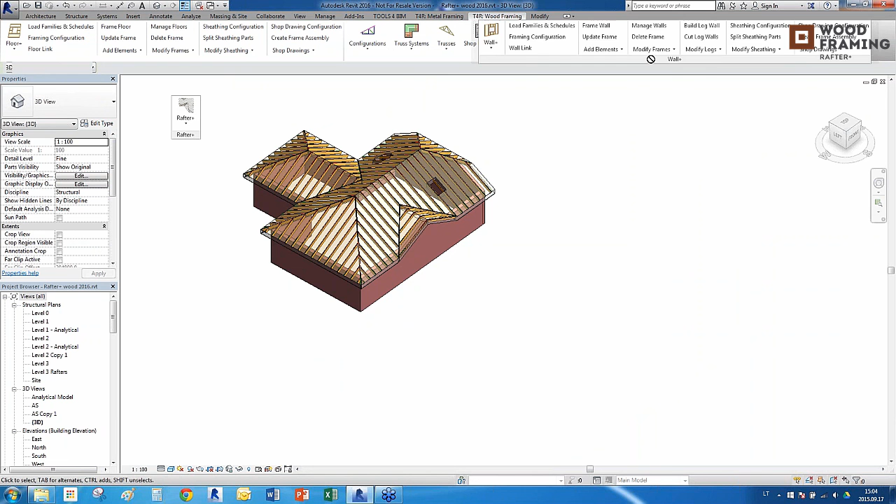Now I would like to insert a ridge beam, so I will select two beam systems, and okay, I will go to my... yeah, something was missing. Okay, I'll switch it back. Yeah, now I will select the beam system on this side and the beam system on this side, and I will insert ridge beam.

So again, I have a configuration window where I can choose the options how it will be inserted. So I pick one of them, I select the beam type, I select the extensions and so on for this configuration. I click on OK, and I will have the ridge beam between these two beam systems. Or I can insert it between two rafters, it depends on what I select. So I have a ridge beam now.

Now I will select one rafter and another rafter, and I will insert a collar beam system. I will define again the distances, the type of collar beam, and the connection type. Let's say I'll just add some number here and I will click OK, and you can see now I have here a beam system, and if I update this beam system, I can just insert more collar beam systems and so on. So I can modify all of them at any time.

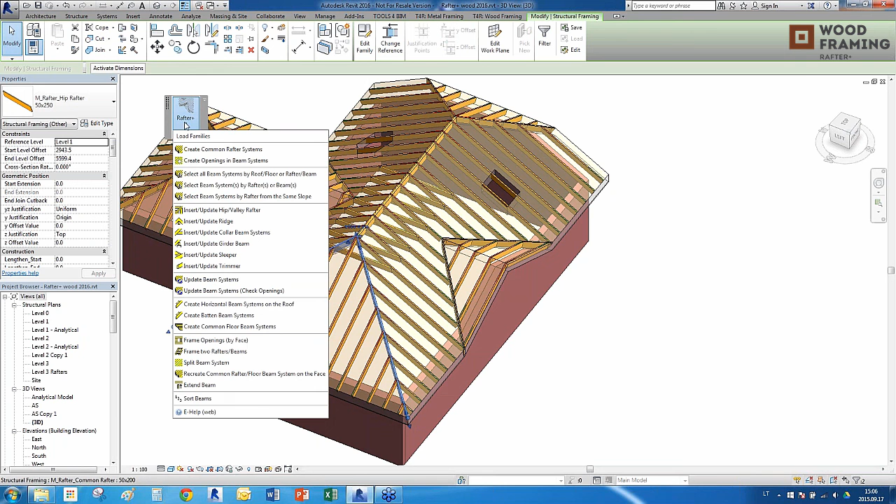So later on I will try to insert a girder beam. So for this I will select these two rafters where I want to see my girder beam, and I will click on insert girder beam.

Now again, configuration window with the placement options, and if I want to use the birdsmouth cut, I will define the cut height, I define the section of girder beam, the distance. For the distance I will choose to pick wall, and I will select this wall, and you see that level is automatically recalculated according to the wall, and I will click OK. So it will place my girder beam on top of the wall with distance of a birdsmouth cut.

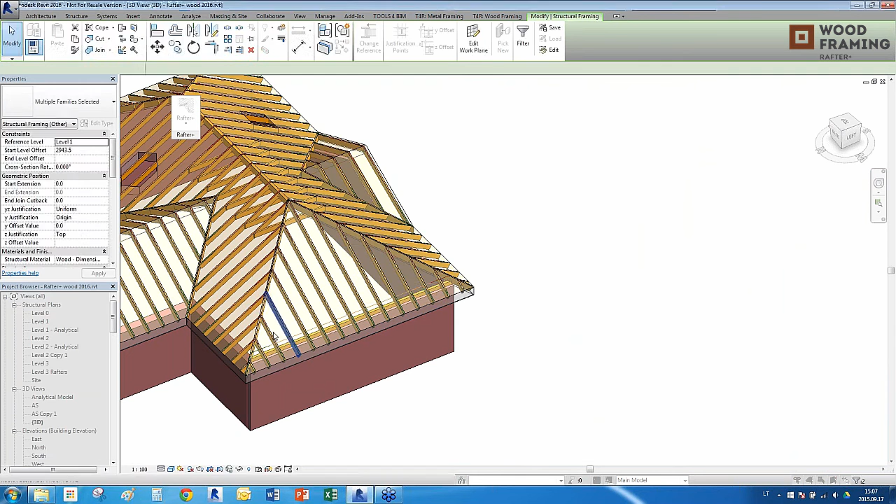So I can insert like this, so again I will go and insert another girder beam. So I will choose to insert girder beam, and now I will pick source girder and I will select this one. So it will insert the girder at the same height as the previous, as the source girder, and I will click OK. Okay, so I have two girders now, and I can go around and reach the result I want. Okay.

Now I would like to insert batten beams. So for this I will modify my roof. I will insert additional layer on the top for the batten beams. Okay, I will do it like this. I will insert additional layer of 50 millimeters, and I will click OK and OK.

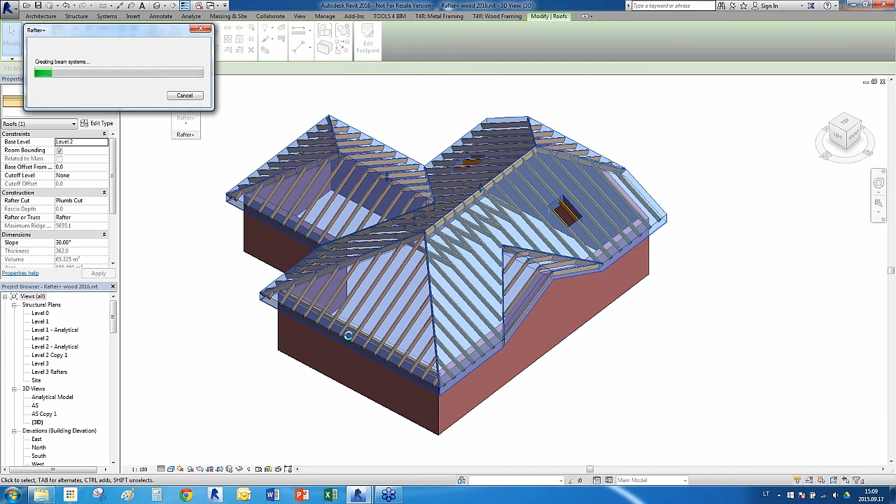And now I will choose option to create batten beam systems. And again, the beam type, the spacing between them, where to place, how to place, it should be according to the slope of the roof, or it should be horizontal, perpendicular to the rafters, and I will click OK. So I will have batten beams placed on my rafters. So it will be beam system on every slope of the roof. It will be placed automatically, so I don't need to do anything manually.

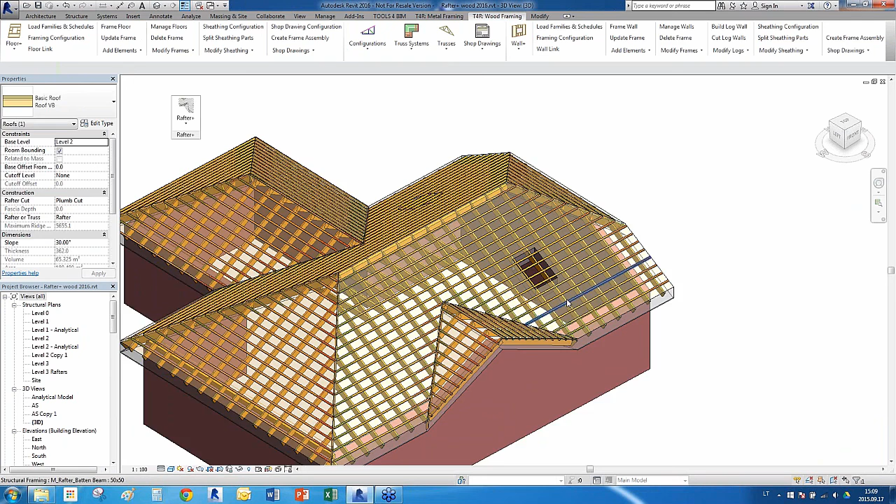Okay, so we have batten beams on the top of my rafters with a predefined distance, and now I can update my roof according to the openings. Like if I select the beam system of this rafter, I will click to update beam system and check openings. Again, I can change configurations in the update mode, and now you will see that rafters will be cut according to the opening.

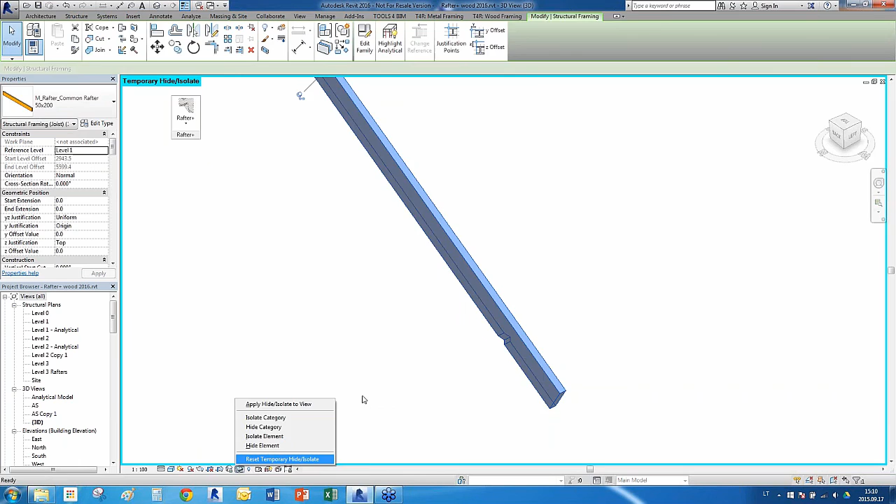They will be cut according to the ridge beam, and you can see now that this rafter of this beam system was cut according to the ridge beam. It was cut according to the hip rafter, and you can do this with all the beam systems at once or one by one. I will click with this one, so you can see that I have girder beam here, so I want to show you that now rafter is cut according to the girder beam. You can see this, and they are cut according to the hip rafters and so on. So elements are updated.

Okay, I would like to update batten beams also. Okay, and we'll click OK. So now I have opening in both systems. I will select and insert. I will frame openings. Okay, so I will have some framing elements inserted here. You can see the opening is framed. I can frame 2 rafters with additional elements. Yeah, I select the type for it.

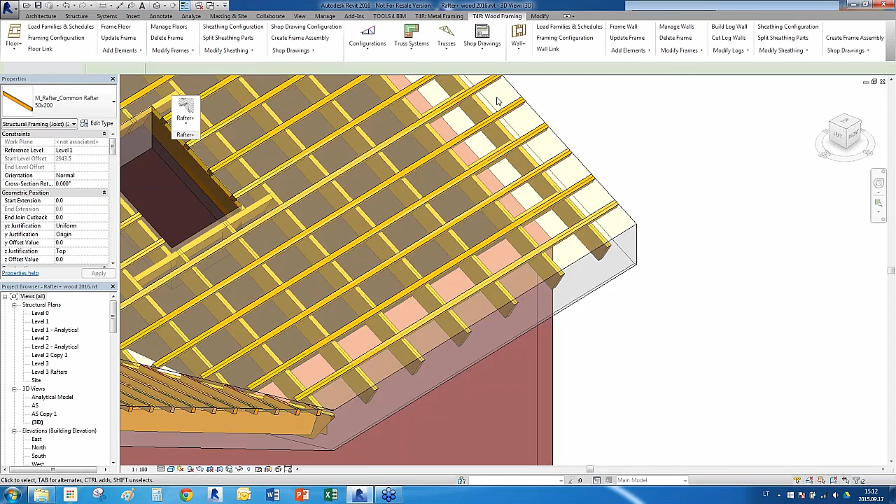I will click OK. So I have these additional elements between these rafters, and we have also options to sort beams to create the marks for every element and prepare drawings with different marks according to the element sizes and so on. So that's pretty much it with the rafters and truss solution for the roof. And I hope you like it and try to use it.

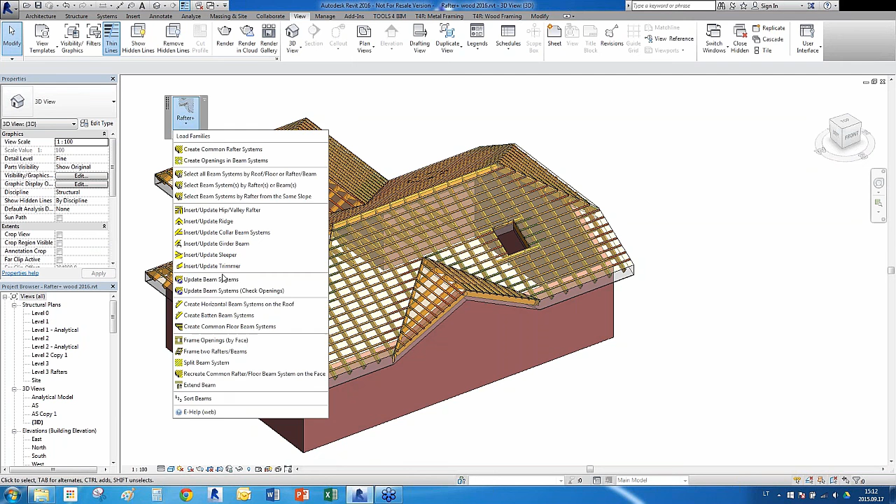And thank you. I just wanted to say once again that every frame could be exported to CNC machine because we did some special features for the clients which have CNC machines, and we can very easily make an export to CNC machine. Okay, yeah, like with the Truss Plus. Yeah.